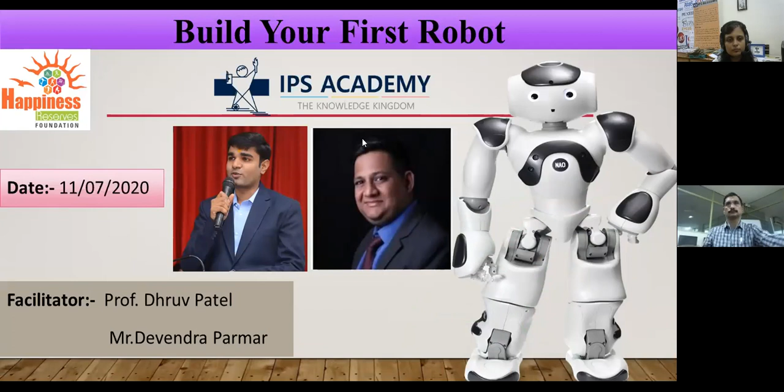First of all, let me give my introduction. Basically, I'm a professor in one of the engineering colleges in Ahmedabad, Gujarat, probably on the mechanical side.

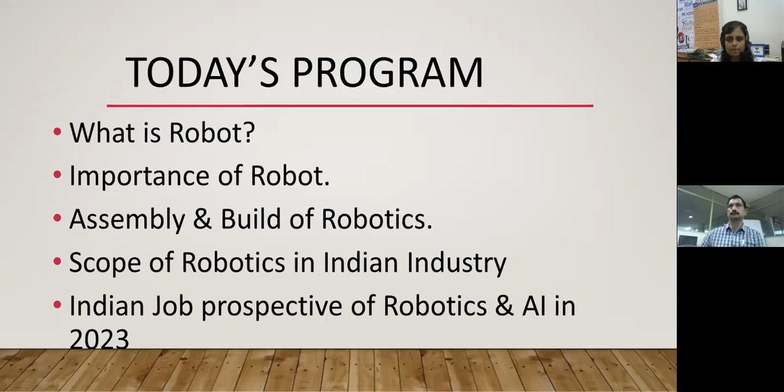So let's start with the good thing which is called the robot. Whenever robots come to mind, at that time only one thing comes to mind, that's robots.

There is a very good South movie, Robo, right? Till now, most of us are familiar with robots only through movies, and especially that's one of the very good movies with Rajinikanth. But there are so many pros and cons and things related with robots that we don't know about, and that's one of the reasons we are conducting this kind of seminar and webinar.

Second thing, whatever particular study you are doing right now, whenever you come into the market, you have to deal with this kind of technology. I think right now the audience is a mix of MCA, MSc, and I think some 12th science students also, right?

So this is one thing, and this is the biggest problem for academics: we always face the problem that whatever you learn, most of it is not such use in industries. That is the big problem. So that's why we are taking this kind of initiative, and through this webinar you might get the idea of what this field is, and what is the scope of this particular robotics field. That is one of the reasons we are taking this kind of session.

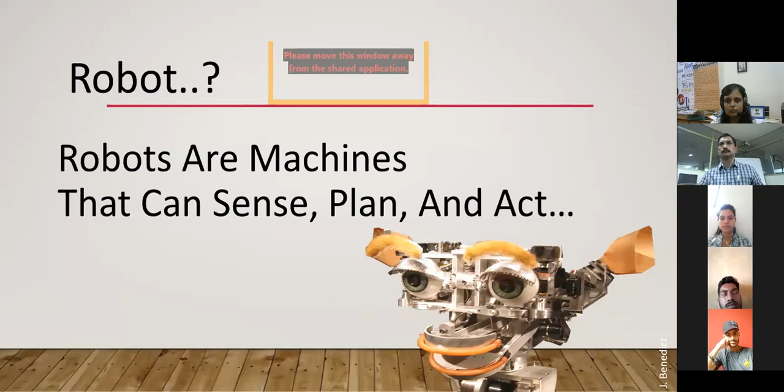So you can say for any product which can sense, how do you do that particular sensing? Obviously we need some sensors, and the sensor we are fitting in some PCB circuit, and through that we can sense, right? So that is one option.

Second thing, the plan. Plan is just like where your robot should run, right? Based on that you can do it, but the thing is whenever you are doing the planning, it's much needed for memory, right? For example, like humans, we people do some planning, but at the same time where we are doing that plan, obviously it's in our brain. So a robot also has a brain, which is called the PCB circuit, and this understands language - some coding language related with Arduino, which is related with graphical coding, which is Raspberry Pi. Then some other languages it can understand: C++, Java, Python, and others. So this is for the plan.

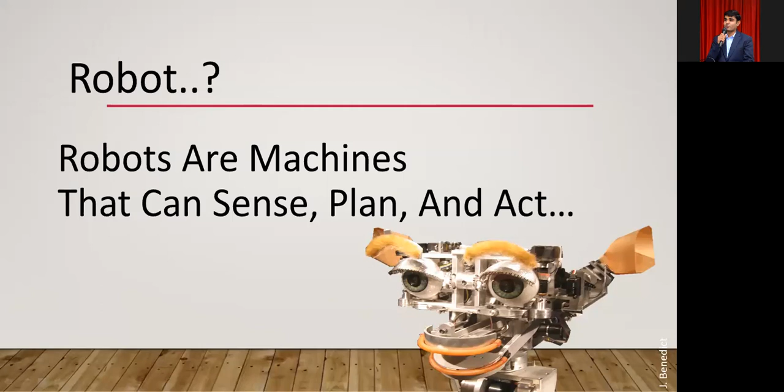Now coming to the second part, what can a robot do? We have so many things - some of the things that till now we only imagined, right?

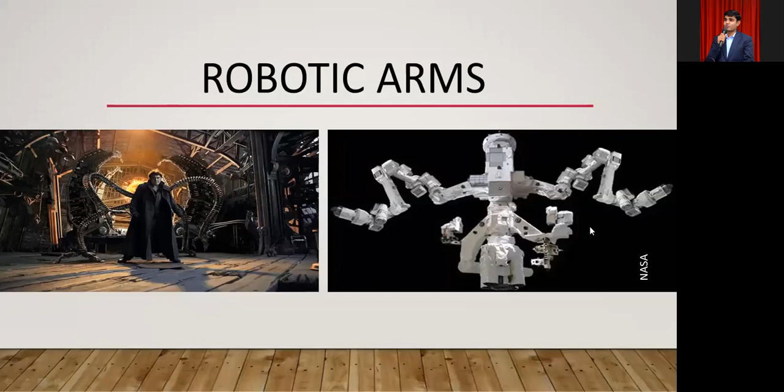Now, what else do robots do? Robots are also used highly in packaging industries. For example, packaging for brands like Samrat and Lays use robots. One such robot is the Fanuc palletizing robot. Fanuc develops such robots which are used in the packaging industry.

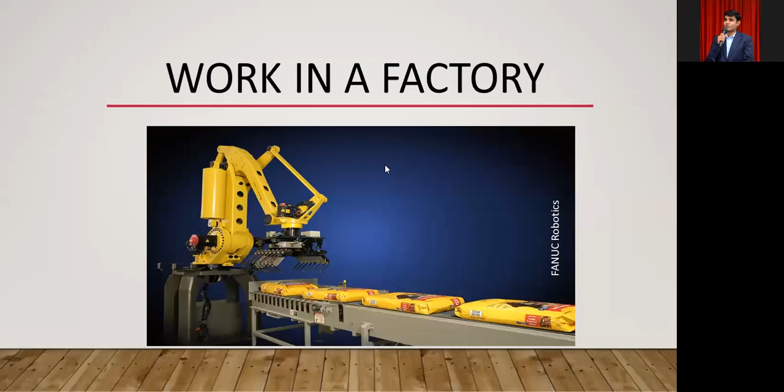So robots can work in factories too. Another thing robots can do is draw portraits. This was one of the biggest challenges during our secondary and higher secondary studies, where drawing was very difficult, and many of us used to get sketches made by a neighbor or friend. Now there's a robot developed by KUKA robots that can draw portraits. So that's another thing from the robotics point of view.

Now in the second portion, we'll discuss where these robots are used, or what types of robots are available currently. This will be discussed over the next 5-10 minutes. So basically, the first type is the humanoid robot.

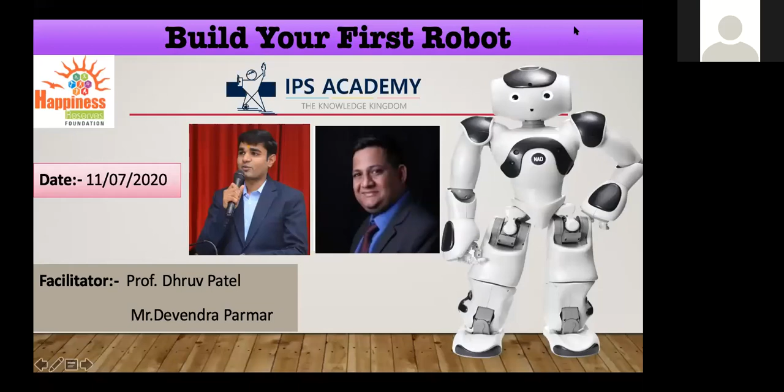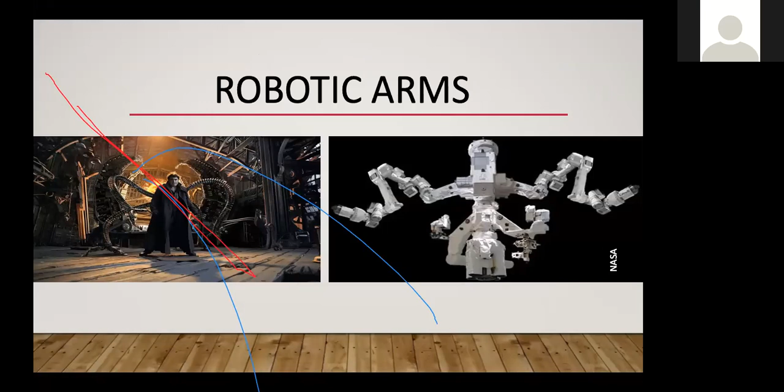I think now everyone is visible. Yes sir, your screen is visible to us. So as Dhruv sir said, the basic thing is a robot can sense, plan, and act. So when you are defining a particular robot, you need to take care of these three things: one is sense, second is planning, and third is act. Sense always comes with different sensors.

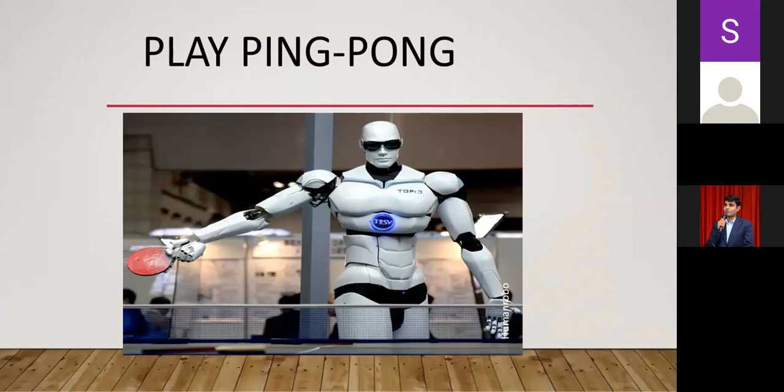There are also robots which work for exploring space. NASA has developed very nice robots for space applications, and already did trials in space. These are some of the robots which will be exploring space.

When talking about space, we cannot ignore solar applications. There are robots which soar like a bird, named the Festo robot. The Festo robot actually works by spying, and flies in the sky measuring activities run under the hood in some border applications as well as exploring space.

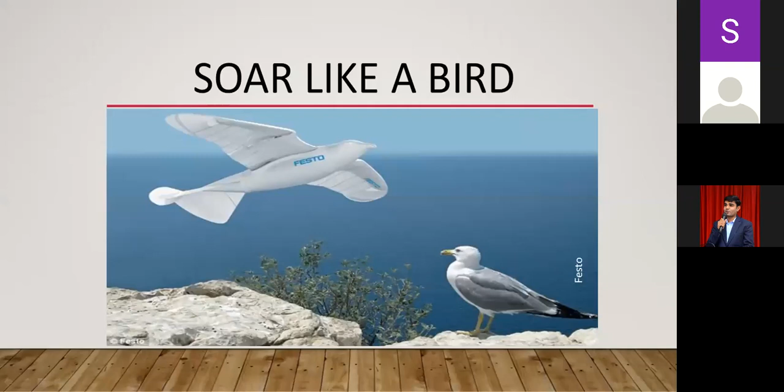This is developed by some universities, as well as other robots developed by Harvard University for spy robots. These are very nano in size, and can be located on your shirt buttons or somewhere around, spying and recording activities present somewhere, including in other countries. This robot is very useful in defense industries, developed by a faculty member at Harvard University.

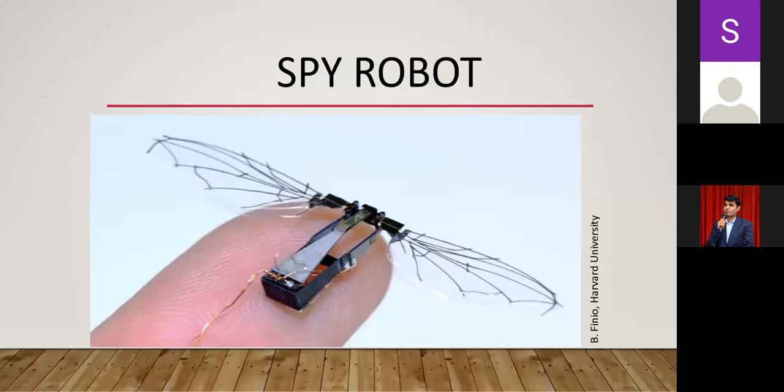Moving to medical science point of view, for biomedical science there is a robot called the nanobot. Right now in this COVID condition, we need such nanobot robots. For any medicine that has to be injected into your body, nanobots can work at the body level as well as for the heart. For such applications, this robot is used.

Some other robots actively work for the defense sector. In defense science, there are robots being developed, and DRDO is planning more than 1,000 crore for development in the field of robots.

Now, in the next part, we'll discuss assembly - how to make a particular robot and which hardware you are required to make that robot. I request Devendra sir to please explain the assembly part of the robots.

Thanks, Dhruv sir. Hello everyone. As explained by Dhruv sir in the starting, there are three things any robot can do: sense, plan, and act. For the sense part, based on sensing, there are a number of sensors available in the market which can act as the sense part.

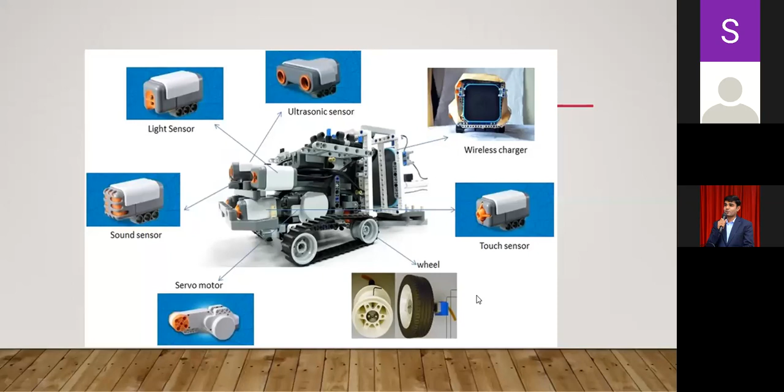So if you are defining a robot as a human body, in our body there are different senses like touch, smell, sight - these are the senses. Then second, we need a particular brain to operate all this actuating, so to move our hands, legs, head and everything, those commands are coming from your brain. So that is the coding portion.

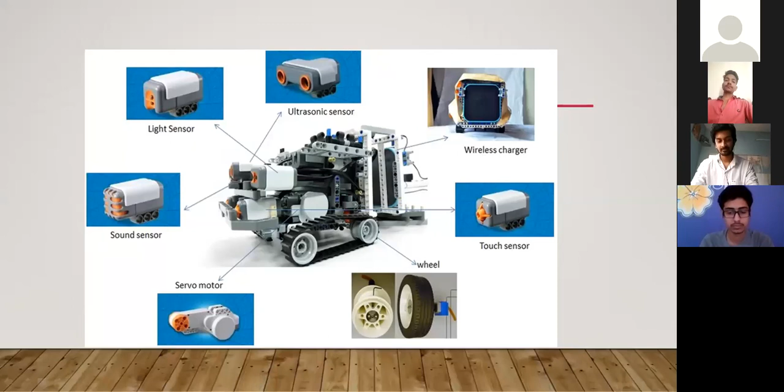And then you need one particular chassis, that is a skeleton. Each and every robot must have a chassis - it can be a metallic chassis or a plastic based chassis, totally depending on your application. And then every human needs food, which is the energy portion. Each and every robot has kinetic energy or chemical energy in terms of batteries - lithium ion, lipo batteries, and many others to run the robots. So you need to charge the robot periodically.

So now we are starting from the basics. In engineering, Arduino is the most favorite board for students. The Arduino board is a basic board which can accommodate a number of sensors available in the market, and these are the starting level sensors - not industrial level sensors, but you can start with these. So you can see the number of sensors on your screen.

The ultrasonic sensor, the line following light detector, humidity, pH measuring, then gas sensors. So based on your different applications, there are numerous sensors.

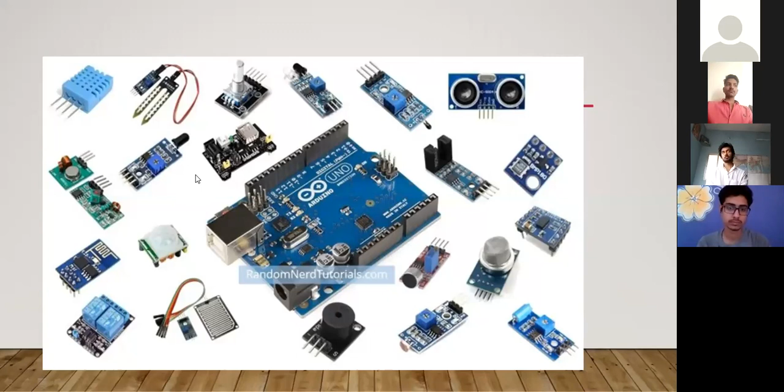So always remember that in a robot, three things are always there. First is sensing, with the use of sensors. Second is planning, with the use of coding - it can be graphical coding, Arduino based coding, or any other language based coding. Third, you need to do some work, based on your actuators. Actuators can be a motor, wheels, different mechanisms, a gear, an end effector, or a gripper. So these three things relate to robots like this.

So today we are going to discuss one basic robot, the QU-Bot, which is a very basic, quickly programmable robot that can follow the line, avoid obstacles, and run a specific distance by calculating the number of RPMs of the wheels. So how to assemble it and how to run it.

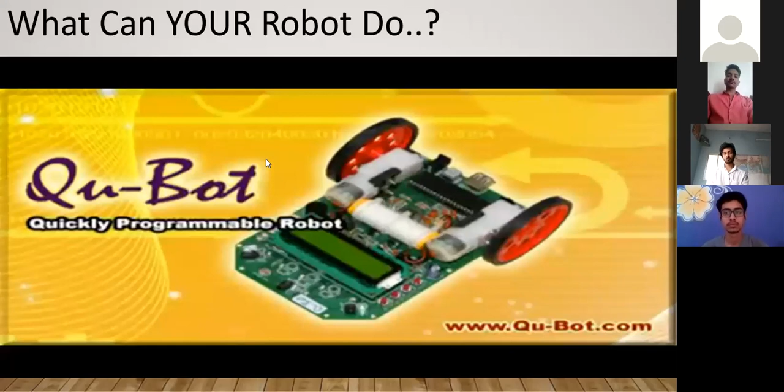There are a number of basic parts in the QU-Bot. You can see on the screen there is one main chassis and a board - it's a combination of chassis and board. On that particular board, you can see the number of sensors and components. Then you need a programmable cable, and if you want to operate with a remote, there is a remote as well. There are different motors, wheels, an LCD screen to see what your command is doing, and charging and battery. So today I will show it's a basic robot - how to assemble it.

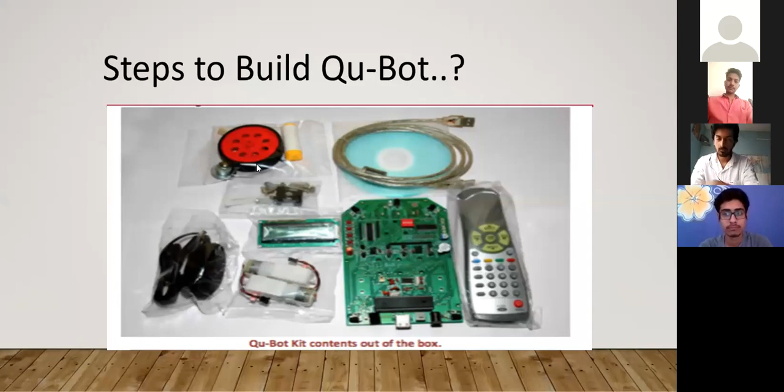First, there are a number of mechanical parts: caster wheel, motor clamps, cable ties, and different screws and nuts that will be used to hold the motors and the caster wheels at the front side to run the robot.

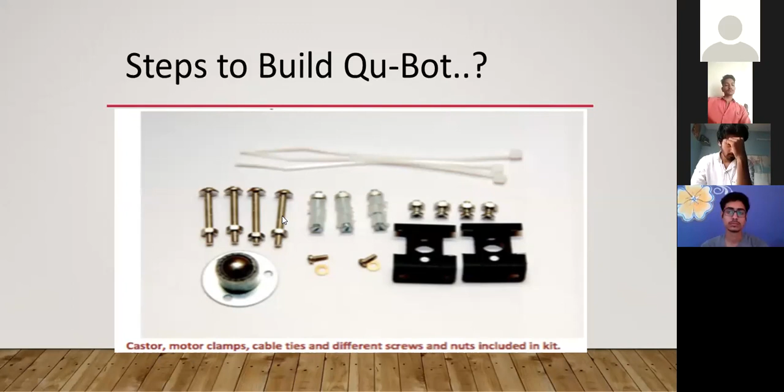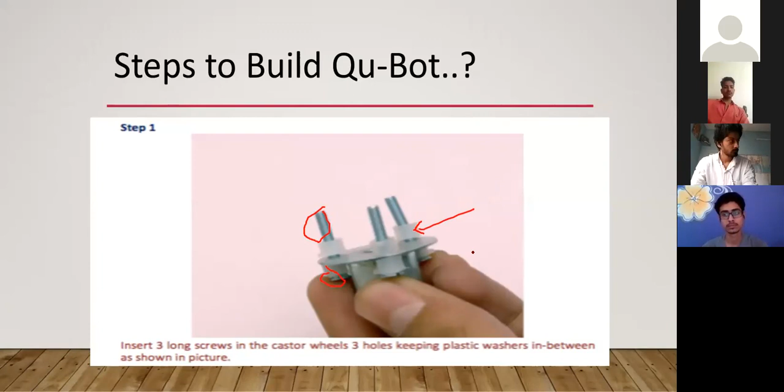So now the first step, you need to insert the screws like this as seen in the figure at the bottom. Always make sure there is a plastic spacer, so it will avoid a short circuit between your PCBs, because in this robot your chassis is your PCB. So please make sure of that, because it can short circuit your routings if it gets damaged.

Then step 2, you need to insert these 3 screws like this. There your caster will be inserted like this, and then you need to tighten the 3 holes, and you need to tighten the nuts when you are passing the screws from these 3 holes, as you can see on the screen.

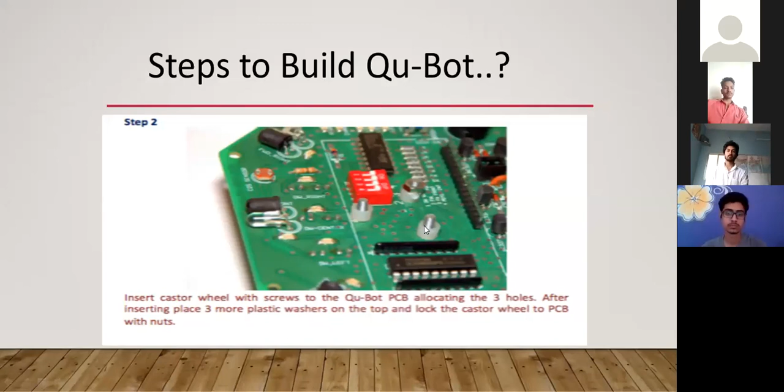Now it's time for the battery. With the cable tie, you need to insert the batteries. There are 6 holes there. So you need to place your battery, and with the use of the cable tie, you need to tie up the batteries. And then there is a battery plug. You need to plug the batteries into the board.

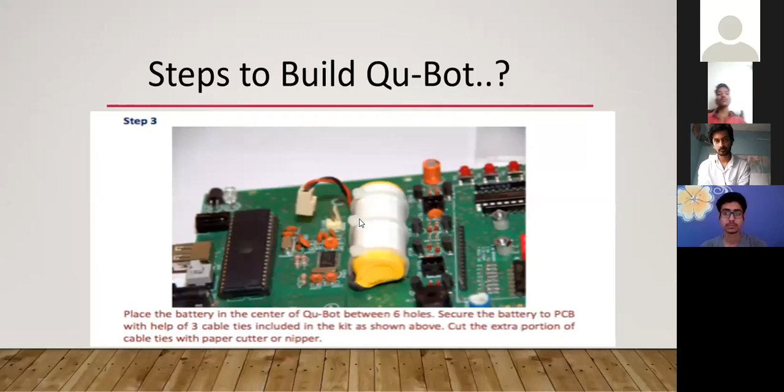Now your caster wheel will sit at the bottom side. Just beside the caster wheel, there are 3 sensors which will act as line following sensors, so you can use any 1, any 2, or any 3 sensors. If I am programming, I will use the first and third sensors to avoid the line, and the center sensor to follow the line. That is totally based on your imagination, your algorithm, and your coding, and how you are going to deal with it.

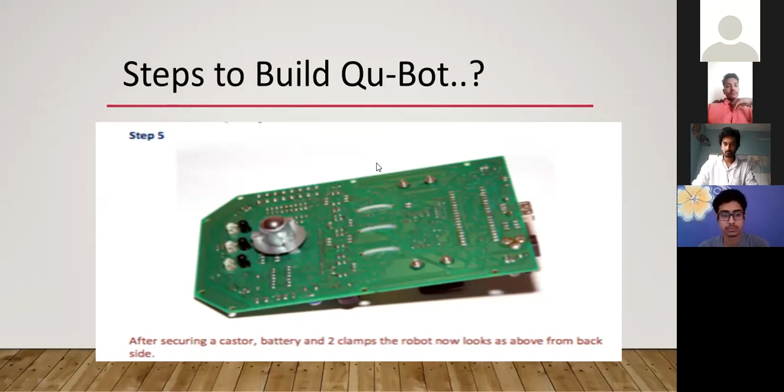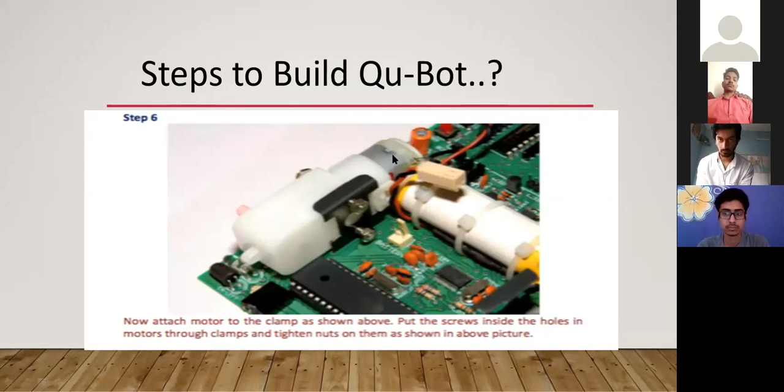Now in the next step, you need to take your simple BO motors. You need to insert the motors like this, inserting the 2 screws from the motors, and attach your motor at the C clamp which you installed in the previous step. So it will look like this. You need to tighten the screws. You need to install these 2 BO motors like this, so the shaft comes out on the outside.

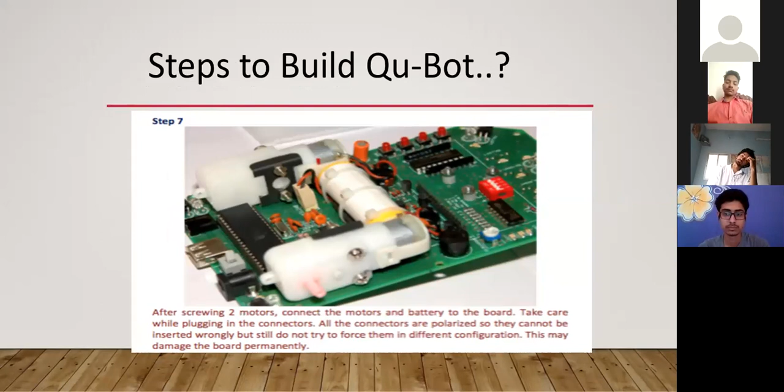Now in the shaft, you need to insert the BO wheels with the use of one particular screw, so it will fix the wheels perfectly. Also you can see the number of holes on the wheels. At that portion we have a sensor which is counting the passing of the number of holes, and based on that you can program the robot on how many centimeters it can go forward or backward.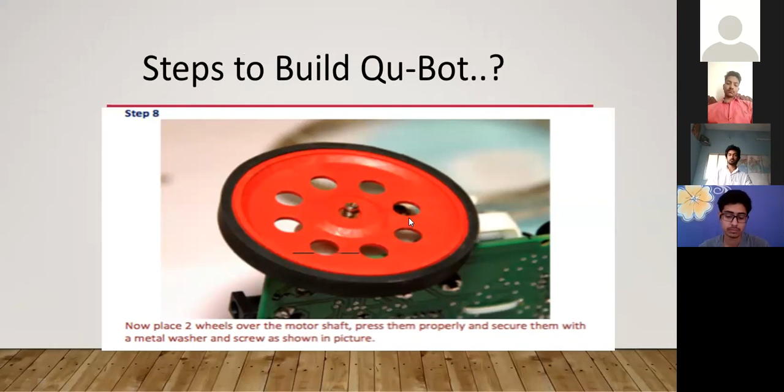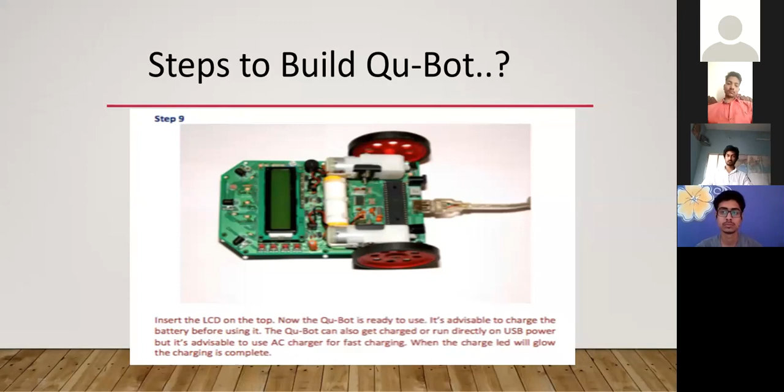And at last, after the assembly, you need to program the robot. With the use of a simple regular USB cable, you need to program the robot by connecting it to your computer. In the computer, for this particular robot, you need to use graphical coding, as it's a basic level robotics kit. In the next slide, Dhruv sir will explain the basics of graphical coding.

Before that, we have a number of parts to identify. You can see number 24, number 22, number 21, number 10, and number 9 are the sensors. These are the sensors available directly on the board. And at the bottom, you have 3 sensors. So in total, you have 8 sensors on this particular board.

Based on your own algorithm, your thinking, and your different applications, you can use the sensors. For the front sensors, sensor number 24, sensor number 22, and sensor number 21 are mostly used for obstacle avoiding or hand following gestures. You can program these 3 sensors so they can avoid an obstacle or follow a particular obstacle or your hand. Then at the back side, number 9 and number 10 are the 2 sensors used to count the rotation of the wheels.

As I said previously, there are a number of slots given on your wheel, so that sensor will count the number of slots, and based on that you can program how much distance the robot can go forward or backward, and after how many steps it can rotate left or right. It's totally based on that. At the bottom of the robot, there are 3 sensors, as we discussed in the previous slide, used particularly for line following applications. Also, we have one buzzer, that's number 4, and one sensor, that's number 3, so we can also do a basic sunrise alarm kind of program.

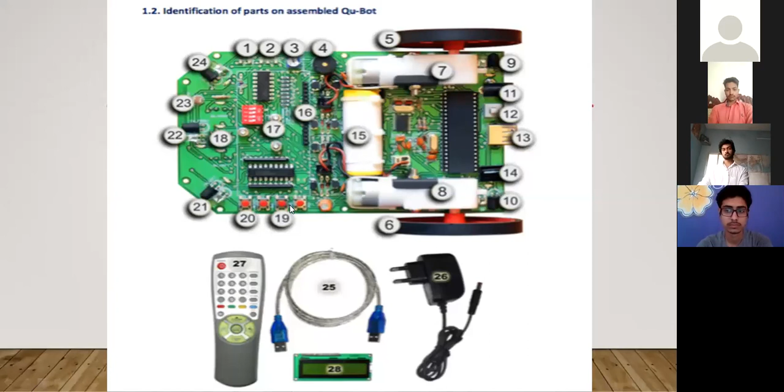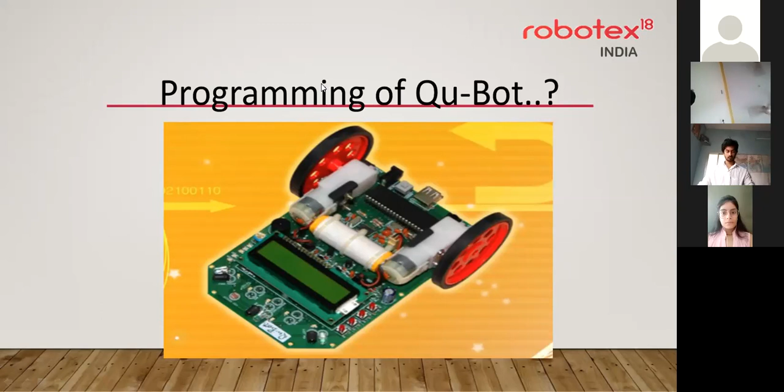So this is the basic thing. Now for the next portion, Dhruv sir can explain the basic programming for the Qu-Bot. Qu-Bot uses a graphical language. The first portion is the sensing portion, which we've discussed along with the different actuator portions. Now the second portion is the planning portion, which is based on graphical coding.

Dhruv sir: Okay, and yeah, I'm extremely sorry, due to some weather problem, there's some bandwidth issue. But here I'm going to give you a demo of how this program runs. This is one of the software pieces, and the name of this software is QBot. It's a visual software.

If you observe the screen on the left hand side, there are some components and variables listed, like variable, delay, variable operator, counter, buzzer, LED, LCD, motor, and some UART. Over all these variables, you can run the program by giving some conditions, like if-else with motor, if-else with sensors, and some switch conditions.

So for example, if I want to run the program for line following, I just open my program. Now just observe that, I'll go to open. Here are some demo programs that I already made using this Qu-Bot programming.

And I choose, look at these different types of programs like alarm, sunrising alarm, doorbell, obstacle avoider, wall hugger, single sensor line follower, sensor line follower, distance measure, edge avoider, hand follower, line follower, and IR remote control. So for example, if I choose one of these things like single sensor line follower, and open it.

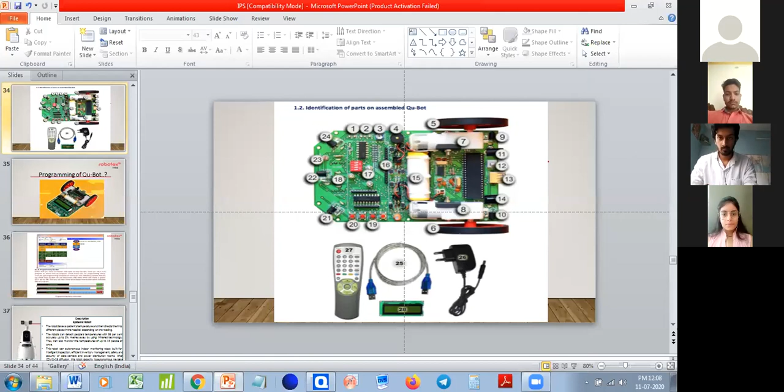And as Devendra sir mentioned, there are 4 switches, 20 and 19 number. Over here, that's switch 1, switch 2, switch 3, and switch 4. So you can choose one of the switches, like this one, switch 1, number 20. And it will make for the 0,0 condition, it comes to that home position.

Then you can set some conditions like while condition, end while condition, LCD condition, and the delay period. For example, the delay period means that whenever you are pressing switch 1, within 1 second your robot and sensor should act on that. And if I want to delay more seconds, I just click on this delay period, go to the time value, and set it to 5 seconds. Then it's done, 5 seconds.

Then the next portion is for the motor. The motor helps you increase or decrease your speed. But as mentioned, there are 2 types of motors here, one on the left hand side, another on the right hand side. After the motor, the wheel should rotate on one particular axis, and that axis is nothing but that particular motor. So that's how we're using Qu-Bot, if you're observing this image, left and right.

So this is for the left motor. I want to increase the speed of this. I go for the left motor, going on the speed 10. Here it is already pre-mentioned, that means whatever the capacity of the motor is, I'll be putting that. So say for example, if I'm keeping that at eight, then it will be done. So my speed is 8, right?

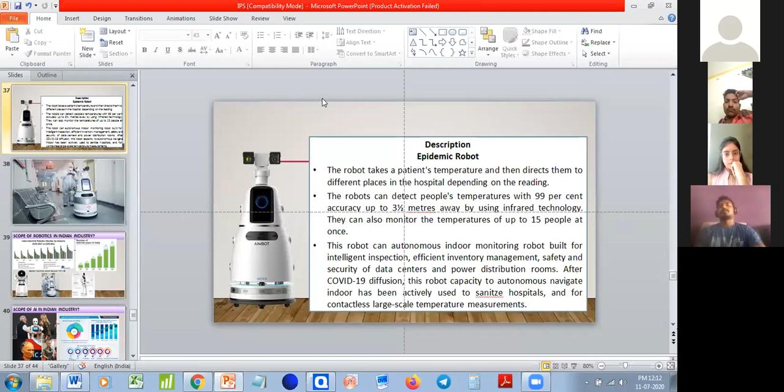Yeah, Dhruv sir, thanks. So as we know nowadays, COVID and Corona is everywhere, right everyone?

In many countries, even in India, lots of robot manufacturing companies are building up different Corona robots for this particular pandemic. You can see on the screen there is one robot called AIMBOT, made by a UBTECH company, and it has different applications.

First, it can run automatically in your particular indoor path. First you need to define your path, and based on that path, it will run automatically. The main thing this robot is doing is monitoring and inspecting the particular Corona ward.

So it has a camera. You can see at the top there are two eye-like things. One eye has a camera, and the second eye has a temperature sensor, so it can sense the temperature of the persons who come in front of that robot. That head is a 360 degree rotating head, so it can rotate 360 degrees.

Then there is a voice assistant, so anyone can talk with the robot. It's a two-way communication. You can voice control the robot using the voice command microphone, and you can see things on the LCD screen.

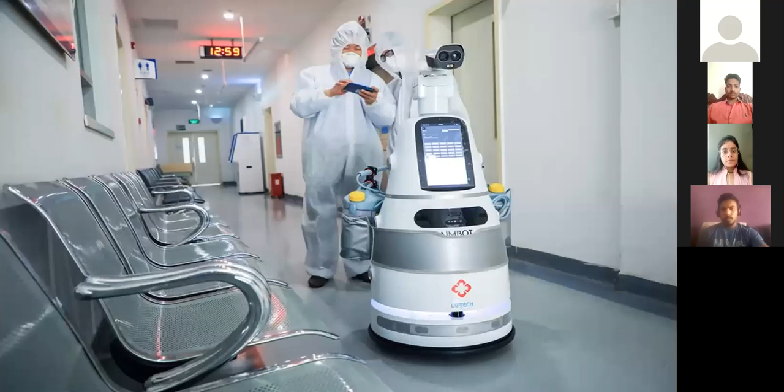At the sides, you can see a number of holes that can spray disinfectant on different surfaces. At the bottom, you can see four wheels that run the robot, and just above that, a rounded circle with slots, which has 360 degree distance measuring sensors. Using those sensors, it runs autonomously in a particular area. So this is one kind of robot used for this purpose.

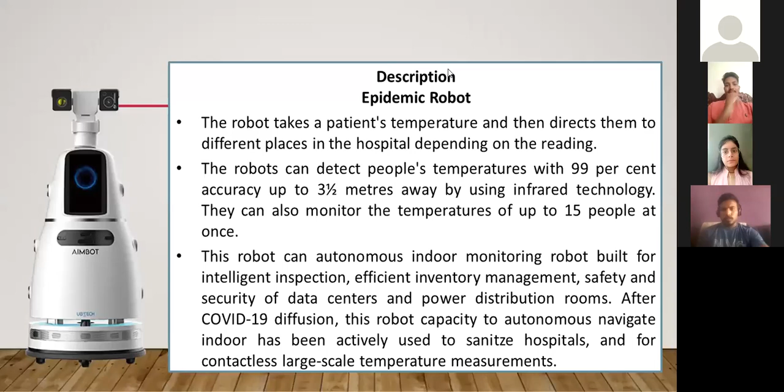Now you can see the upgraded model of the same brand, the AIMBOT. They have removed the head and replaced it with a simpler one, but it still has a camera and a temperature sensor, so it looks like a special kind of toy. At the sides you can see sanitizer bottles.

It's a circular design, so it can rotate 360 degrees and spread the sanitizer very effectively to each and every surface. So these are the applications. You can see that even in this crucial condition, robotics is growing.

Dhruv sir, next slide. I think you need to explain this slide. Yes, so this is the scope of robotics in the Indian industries. If you observe the left hand side and right hand side, some statistic values show that in Indian industries, robotics has been continuously growing in the last few years.

Look at these particular things: in 2019, 2020, 2021, the scene is continuously increasing in all sectors—whether for the automotive sector, plastic structure, food, or pharmaceuticals. So this Indian robotics market should be growing very, very high.

At the same time, obviously we need to validate this statistic, so we are connecting it with the number of internet users in India. As per an IAMAI survey in 2020, there are 730 million internet users in India. So just think about how big the market is for robotics as well as artificial intelligence.

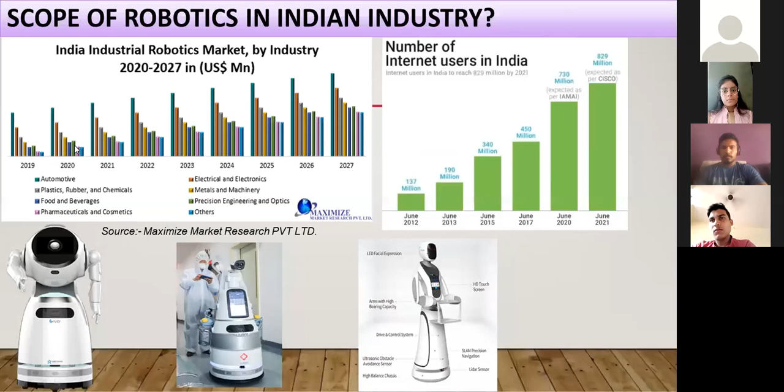As well as talking about the job point of view, and what is the planning by our Indian Prime Minister. So look at this particular area, then you might get more idea how to generate revenue through artificial intelligence and robotics.

So look at this particular pie chart for 2019. It is distributed into four biggest parts: one for machine learning, another for natural language processing, third for context-aware computing, and fourth for image processing. These are four different areas where it is particularly used.

So, for example, media and advertising is one of the biggest markets where robotics products and artificial intelligence are used very highly. Then BFSI, then IT and telecom industries, then retail industries, then healthcare industries, and also automotive and transportation industries use robots very highly. So the logistics sector cannot be ignored, where retail and transportation should be included.

As well as for the healthcare area, right now in this COVID pandemic situation, everybody knows that robots are being used. If the robot is there, it might be possible to minimize community spreading kind of things. So this is the revenue by end user.

So these are the end users where this robot is particularly used. And on the left hand side, if you observe, it is a Make in India robot called Mitra robot. And Ivanka, along with our Prime Minister, inaugurated that particular robotics lab.

And at the bottom side, these two robots, as I said earlier, is the Sophia robot, and she has citizenship in Saudi Arabia. So this is the scope of AI in India. And right now, under the banner of Make in India and the Atmanirbhar package, people are doing more work from a robotics point of view, and the government of India is also supporting us in building this kind of robots.

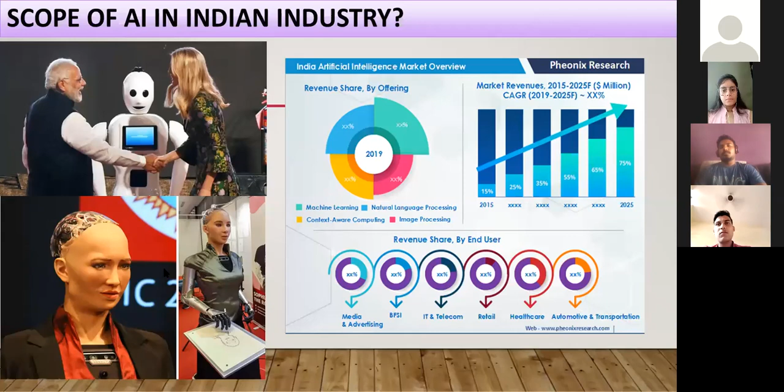Now the last portion is that, okay, this is the scope and all kinds of things, but which are the companies where I'm supposed to get a job. So this is one slide where you get the idea of the top 5 to 6 different companies which deal with robotics.

So number one, Gridbots Technologies, then KUKA, then Fanuc India, then ABB, then Yaskawa India, and Kawasaki Robotics. These are 5 to 6 different companies which are located in India only, and they are working very nicely in robotics.

Their measure of focus for this company is 61% for automotive, then 9% for other manufacturing products, then food products, beverages, and tobacco products at 10%, which is also very high. Then plastic and chemical products at 6%, metal industries at 9%, and electrical and electronics at 5%.

So this is the Indian job perspective for robotics and AI. And whenever you are coming into the market, probably for 2023 or 2024, the scenario at that time will be totally changed, right?

That is what the development by industries looks like - industries 1.0, 2.0, 3.0, and right now industries are working in 4.0, which is purely robotics, artificial intelligence, and Internet of Things, that is IoT. This is one of the surveys I took through freelancermap.

What is the role of an AI engineer and what is the salary structure for that? So basically the role of AI engineering is that you have to work on machine learning, data science, software design, to create and deploy machine learning algorithms, and what you are supposed to require from a knowledge and skill point of view.

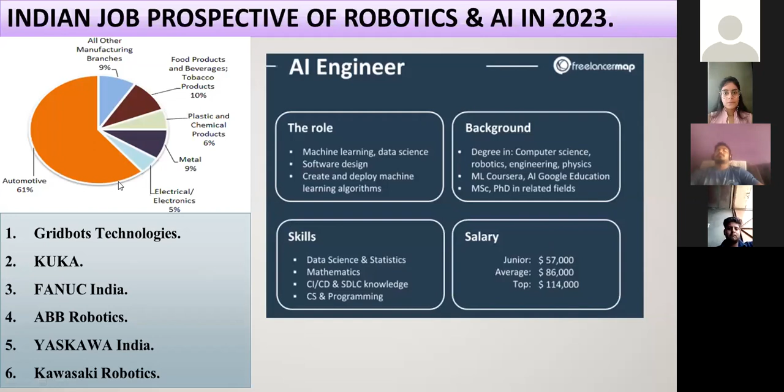So this is the basic overview for robotics and AI. And yes, these are various companies working in robotics and AI, a few of which you might be familiar with. Look at how it is distributed across various sectors.

It covers media, Hollywood and Bollywood kind of structures, Warner Bros. It's also in automotive industries - BMW, Honda - they are also working in the India job perspective for robotics and AI. Uber applications, Amazon, Google, Facebook - everybody knows that.

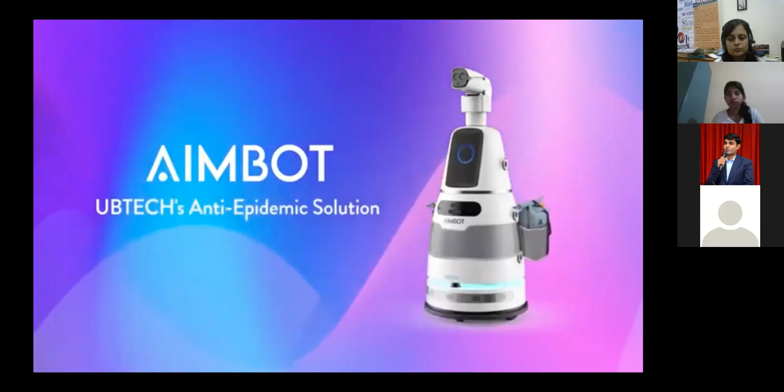This is an anti-epidemic solution by UBTech. This is just an example of how you can design and develop a particular robot for particular selected applications. So based on this, you can see.

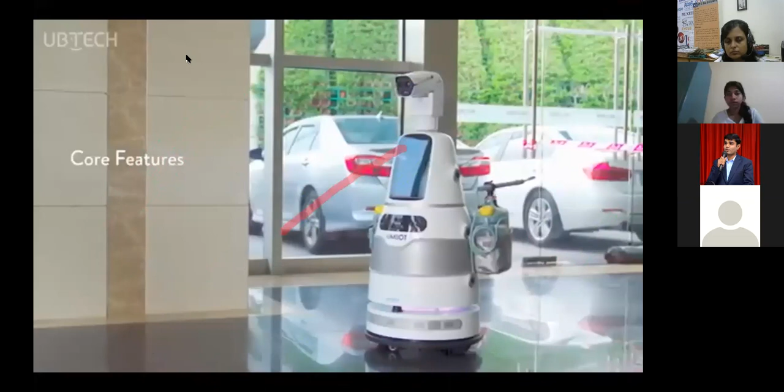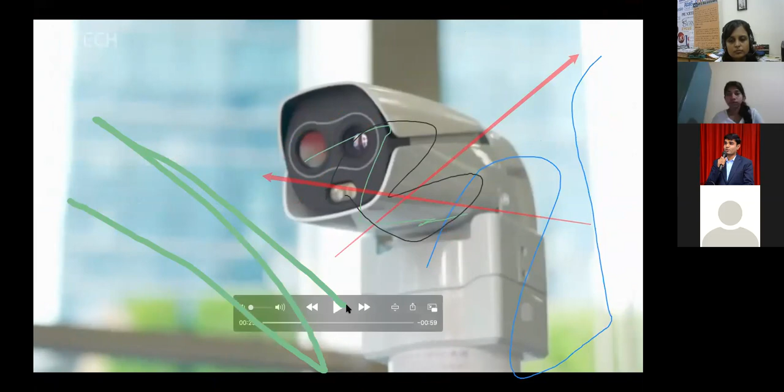So you can see there are basic core features. The first feature is non-contact temperature measurement. Second, automatic disinfectant patrol, and a PA - public address system, along with mask disinfection. Based on that, these are the few areas they are developing this particular robot for.

You can see they have thermal cameras. When people enter the particular system, they can scan at 200 people per minute - that's the solution, so they can scan the temperature of 200 people per minute. They also use disinfection, like spraying sprayers and other things.

So this video should just encourage you, so you can build any particular product based totally on different applications. You are studying different languages, different sensors, and many things during your academics, so you need to apply these things and build something. You can start your startups, and there are lots of opportunities in robotics and AI in the future, as Dhruv sir rightly mentioned, across different companies and different portions of robotics and AI. Believe me guys, the future is robotics and AI - right now your smartphone already has AI capabilities.

Nowadays, companies are giving camera AI capabilities to smartphones for capturing images and everything. So in future, you will see AI and robotics applications in a number of products. The main thing you need to do is the critical thinking portion and design a particular algorithm to run your particular end effector. An end effector can be your robot, it can be your software, it can be many things. So think on that. The future is robotics and AI.